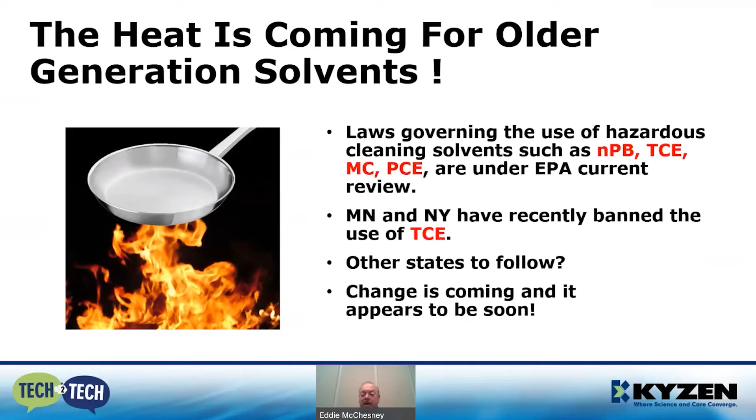Several states, such as Minnesota and New York, have recently banned the use of TCE. And that leads you to question, are other states going to follow? I will assume so. It appears that change is coming, and a change is going to come pretty soon.

And the driving force behind this change is TSCA, that's an acronym for the Toxic Substance Control Act. This is a law enacted by the EPA to preserve chemical use and mitigate the risk to users.

In 2016, there was a document published that had 10 chemicals on it, and 5 of those were traditional degreasing solvent chemicals. Those 5 were NPB, methylene chloride, NMP, perchloroethylene, and TCE, trichloroethylene.

If you look at some of the recent EPA and state actions, TCE has been banned in Minnesota and banned in New York in 2021. NPB has had a total ban in Europe enacted in July of 2020.

If you look at methylene chloride, perchloroethylene, and even HFCs, you'll find that all of these are targets. And if you're using these solvents, you need to consider conversion now.

In 2020, while the rest of the world was slowing down due to the pandemic, EPA was actually fairly busy. The TSCA group formulated the chemical risk evaluations: in June, methylene chloride; August, NPB; November, TCE; December, PCE; and December, NMP.

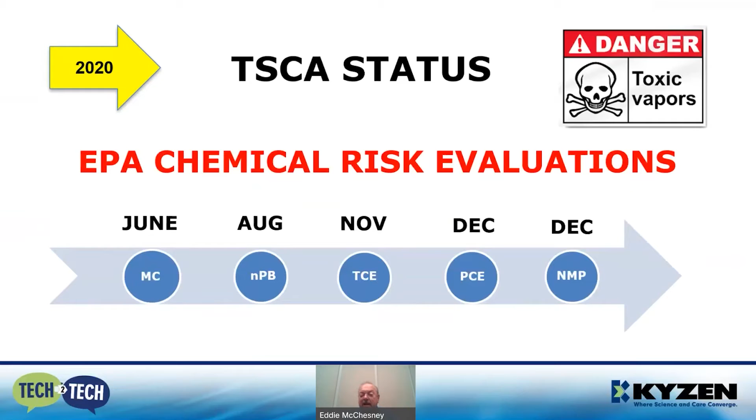All of these solvents are the 5 that were previously listed. If you're using these solvents, we strongly recommend you get a copy of the chemical risk evaluation for your particular solvent. Why? Because if you read these documents, you'll find direct statements with warnings.

That the use of these substances presents unreasonable risk to human health. This is very strong wording.

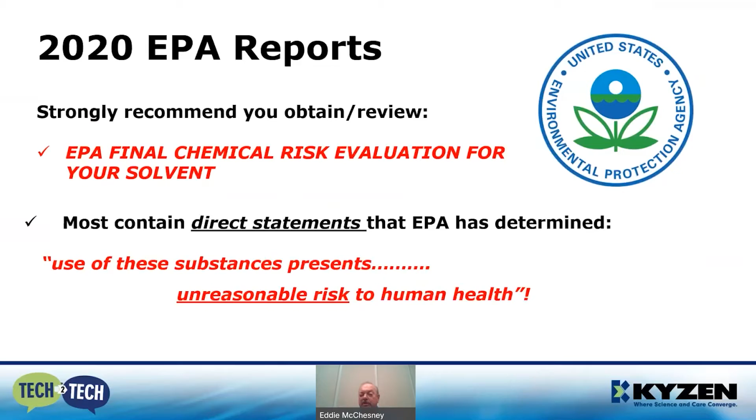Examples of copies of the reports you'll see on the screen. You can easily obtain these from the EPA sites. Your local DNR may have a copy of them. If you're using these solvents, I recommend you get a copy of them and keep them for your files and study and review them. So what happens next?

Well, in 2020, the chemical evaluation reports were released, and those reports basically stated what the EPA thought needed to occur to reduce, restrict, or eliminate the unreasonable risk.

The time frame is 1 year from the official release date for that action plan to be developed, and the final rule is due 2 years from the official release date. So again, the clock is ticking.

The B section of our presentation today: be proactive, be prepared, because what's next? Phase 1 has already been completed for specific solvents. Phase 2 is underway now, if you look at the time frame.

And phase 3 is expected in 2022 as per the law. So if you're using solvent for cleaning and you choose to stay with solvent, solvent cleaning does have a future. But that future is going to be different.

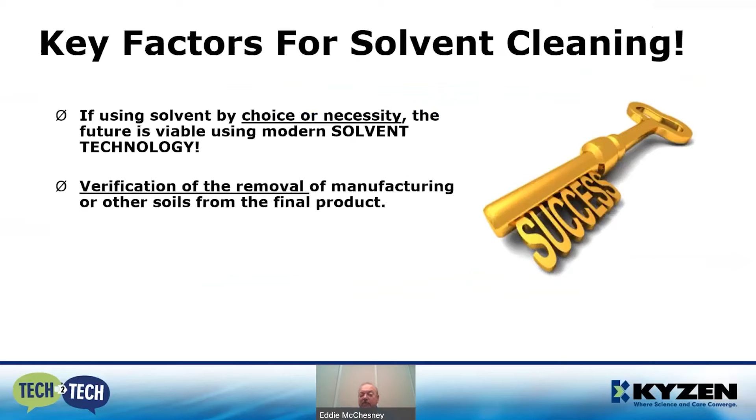So the key factors you look at for success: if you're using solvent by either choice or necessity to fit your application, there is a future. You need to verify the removal of all the manufacturing or other soils from the final product used in your process.

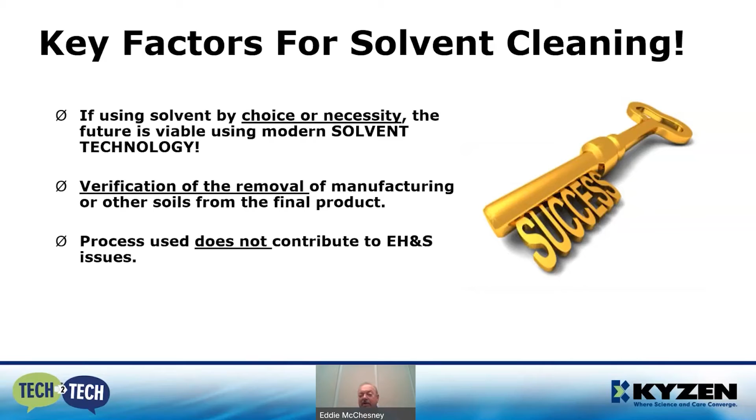You don't want to change to one solvent that may be outlawed again in the future very quickly. You have time to consider this change, but the change is going to happen, and I can assure you it is going to happen. The EH&S concerns need to be looked at first.

The solvent process. Should you change or should you stay? There's an old song by The Clash called 'Should I Stay or Should I Go?' And that's exactly what the solvent process is like. You need to look at that and evaluate what options are available to you.

And any options of change, will that affect your production issues? That needs to be strongly considered. And again, the bottom line is the total operational cost is a factor that we all deal with.

So what do you want to accomplish? Well, obviously you want to make things better. You want to move to an environmentally green cleaning process, so you want to future-proof your options as best as possible. And how do you do this? Replacement technology. And it is on the market today.

The alternatives, the A section of this presentation, in my professional opinion, you have 3 viable options to consider. If you're going to stay with solvent, and these solvents that you're using are being phased out or restricted, you can switch to an alternative solvent.

A second move, if you don't want to stay with solvent, you could look at an aqueous process, and that in fact requires much more homework and new equipment and new processing. Or you could consider vacuum degreasing technology.

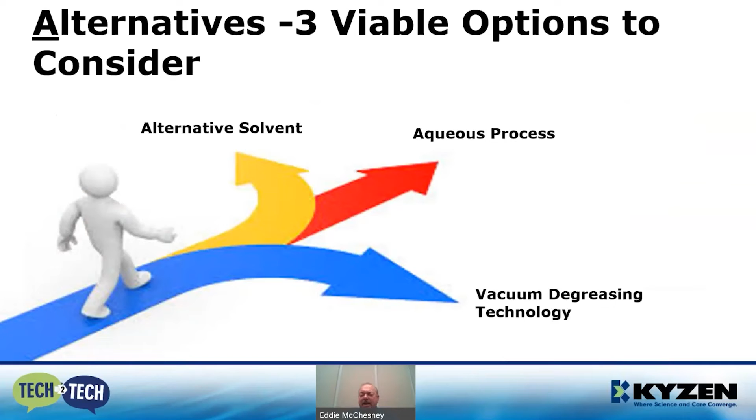This is the fastest growing technology for solvent cleaning on the market today on a global scale. That again requires different chemistry and different equipment. So we're going to discuss the options very quickly.

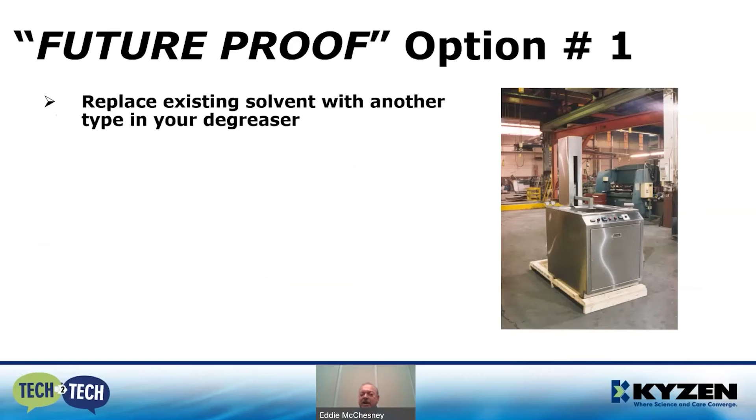Number one, you could replace the existing solvent with another type in your degreaser. Obviously, the more modern degreasers work much better, much more solvent efficient, etc. So if you replace that solvent, you need to consider the system that you're using it in.

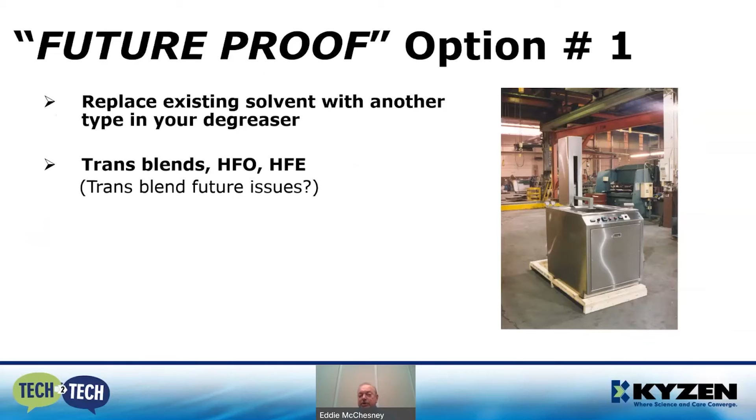There are several different solvents on the market today. There's trans blends, HFOs, HFEs. A lot of these solvents can be dropped into existing machines fairly easily. Some of these solvents, such as the trans blends, may have future issues, but for the current next several years, they're probably the easiest choice to make.

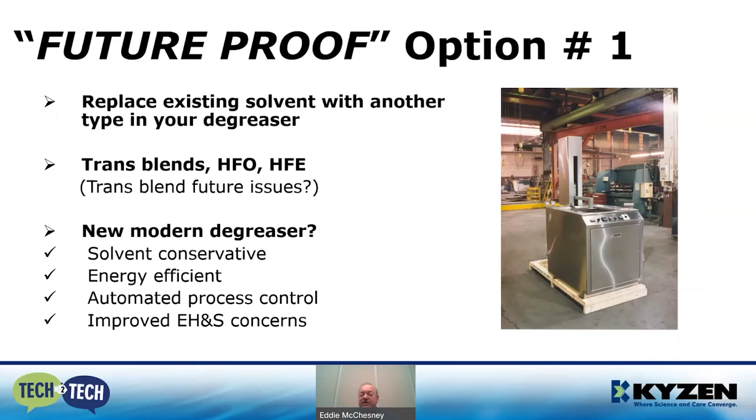You need to look at your degreaser. Are you better served by changing and converting to a new modern degreaser, which uses less solvent, is more energy efficient, and most of them have all automatic process controls to take the error of operator use out of it. And they offer improved EH&S concerns. All of this is a plus for the user.

The second option, you could convert the process from solvent to aqueous if possible. Sometimes it's not possible due to a lot of different features of the aqueous cleaning process. But aqueous cleaning processes have different advantages, and that needs to be considered.

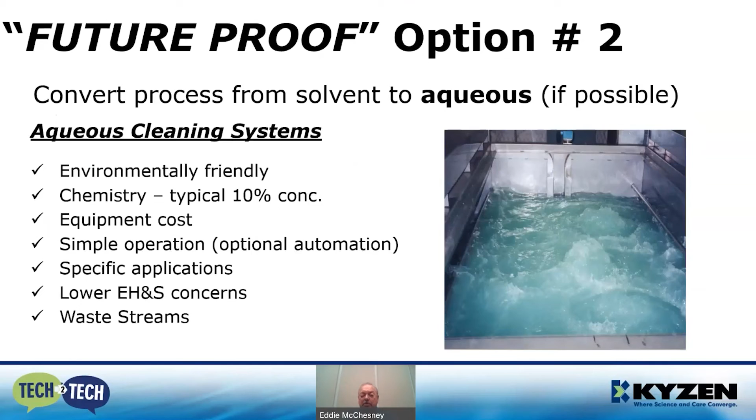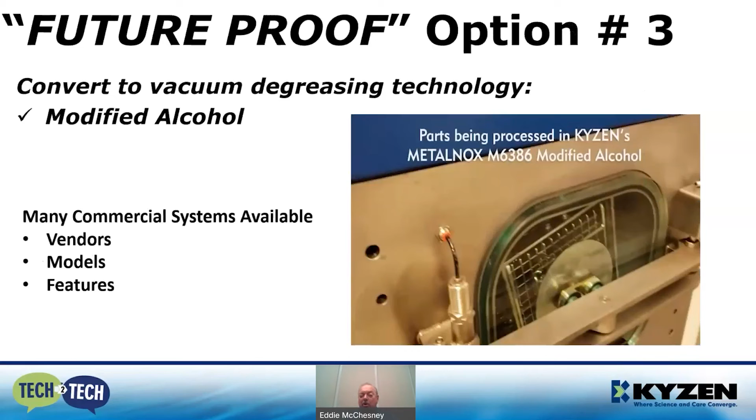Future-proof your option number 3: you can convert to vacuum degreasing technology. This is the future of solvent cleaning today. Most people using solvent and trying to change from traditional solvents are looking at vacuum degreasing technology that uses modified alcohol or a hydrocarbon. There are many commercial systems available from different vendors, with different models and features, all to suit your application needs.

If you've not seen a vacuum degreasing system in operation, I've got a short video to play for you, showing parts being processed in KYZEN's Metalnox M6386 modified alcohol. The machine is basically an enclosed type machine. The work is loaded inside the chamber, the door is sealed, isolating the process from the operator and the ambient environment, and then a vacuum is pulled on the system and the process is started.

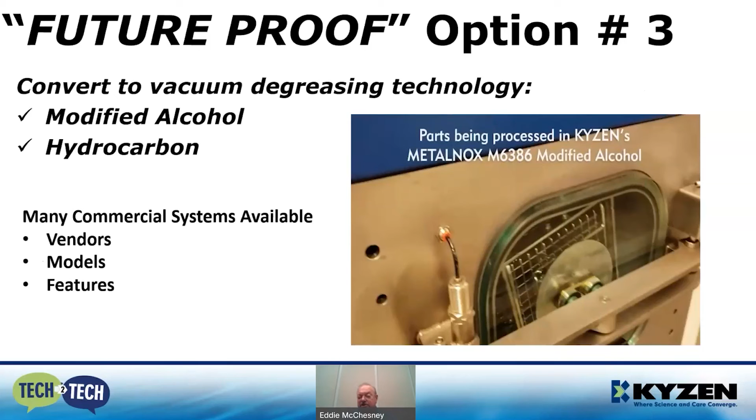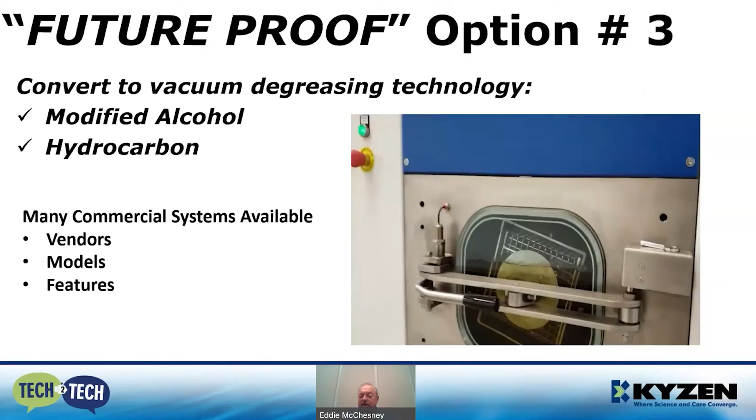That process can feature rotation or oscillation. It can feature spray and air applications, or it can be an immersion with sonics or turbulation under the immersion. The flexibility of these systems allows you to program all the different types of cycles as needed to fit your production needs. So why vacuum degreasing?

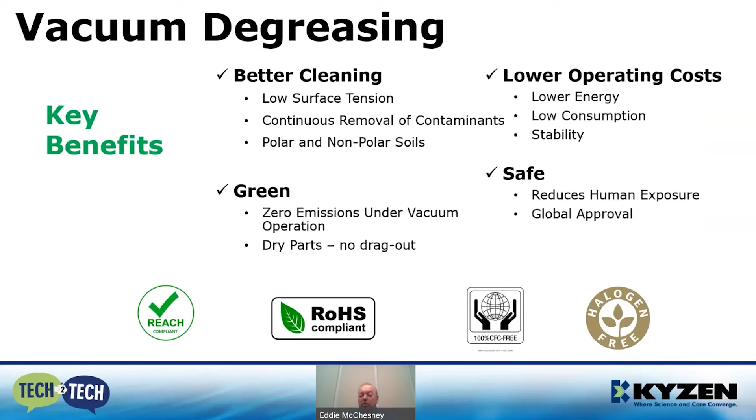The key benefits: it offers better cleaning for a lot of different reasons, especially for both polar and non-polar soils. It's green, with zero emissions under vacuum operations, and the parts come out dry—this is a huge plus. Lower operating costs, lower energy, lower solvent consumption because the machine is sealed up with very little exposure to the atmosphere. And it's safe, approved by different organizations—if you look at the icons on the bottom, you'll see the global approval for these solvents worldwide.

The marketing trends: again, if you're using solvent, most people are moving to environmentally green cleaning processes, especially for complex and challenging parts where water cannot be used or will not penetrate. And if you get water into something, you also have to get it out, so the drying is extremely difficult.

You can move away from the legacy solvents that are being restricted or phased out by the EPA. Water-based processes and existing systems do offer challenging effects for a lot of different things: consumption, discharge, energy, residue, and cost of operation. A lot of people are moving toward these closed vacuum systems that are beneficial to the end producer.

So no matter which way you find the alternatives, you need to calculate the end cost: the cost of compliance, the cost of change of process, the cost of quality, and the cost of operations. All these must be considered for the bottom line. And remember, the EPA clock is ticking on the traditional solvents as we outlined.

Helpful hints: you need to look at environmental compliance because non-compliance is not an option—the EPA is going to assure that. And you need to look before you leap. You need to form your team, perform trials, and test. There's nothing like testing parts before you actually change your production process to ensure that quality is met, production throughput is met, and EH&S concerns are in compliance.

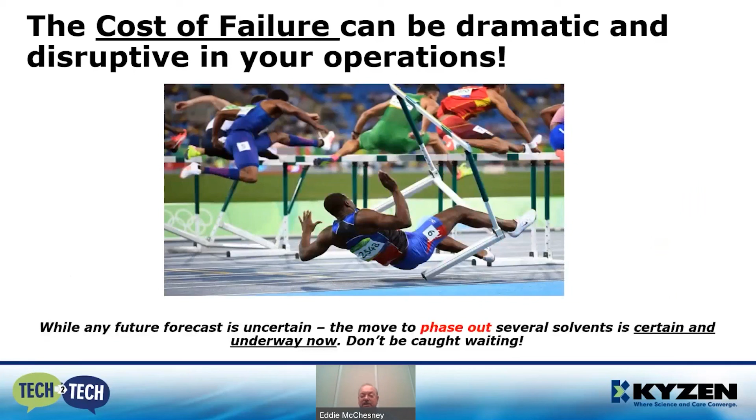Please look before you leap, because while any future forecast is uncertain, the move to phase out several solvents is certain and underway now. You saw the timelines—the clock is ticking. Don't be caught waiting. KYZEN can help you clear your hurdles, and the best deal of the day, our assistance is free. All you have to do is contact us. With that, I'd like to thank you for your time today, and please feel free to ask any questions.